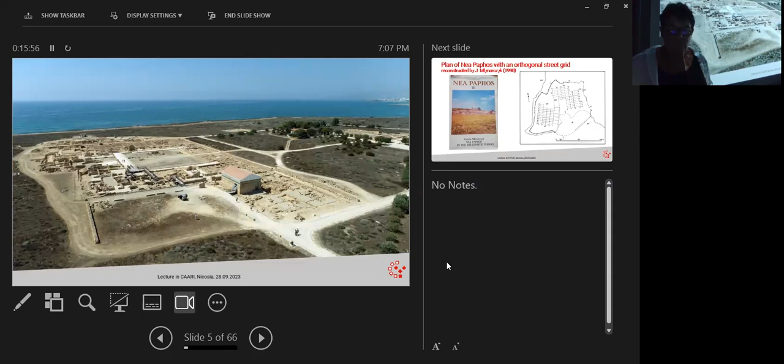In Maloutena, we have uncovered a lot of various buildings, but also the streets of the city. And one of the major achievements of this mission was the publication of Jolanta Młynarczyk of the plan of Nea Paphos, which was an orthogonal street grid, and it was reconstructed in the book published in 1990 by Jolanta Młynarczyk. And I will return to this topic later, showing you our research on the streets.

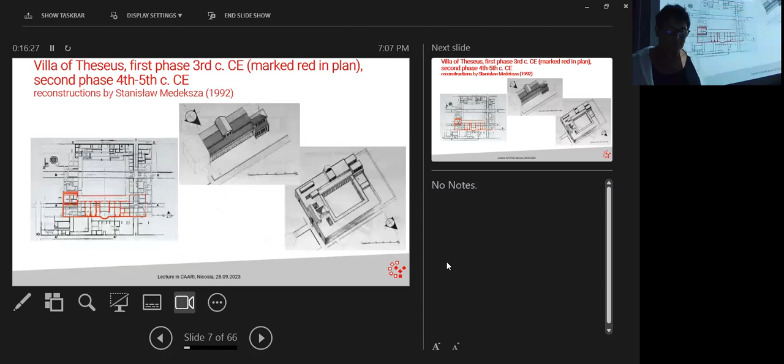The Villa of Theseus was one of the buildings uncovered by the Polish mission from the very beginning of the excavations, and you have here the plan of this villa, and also you see the first phase of the villa, and next it was enlarged, and you have here the two-dimensional reconstructions, and I will show you later the three-dimensional reconstructions made by our mission as the result of our research.

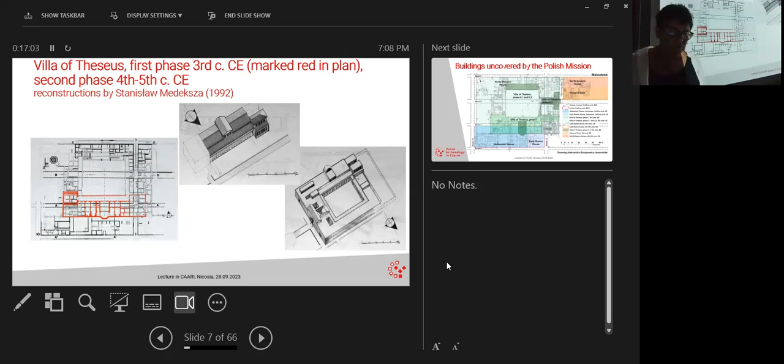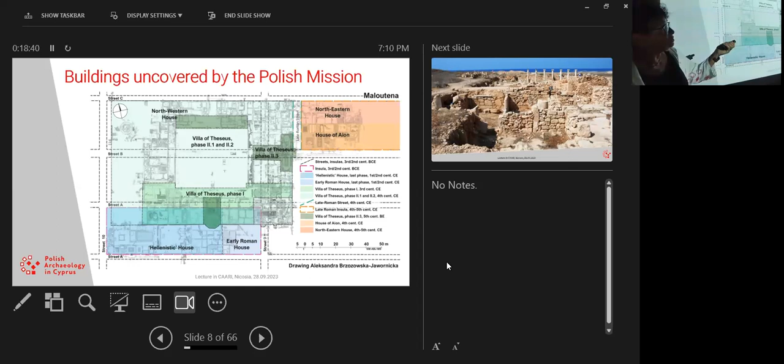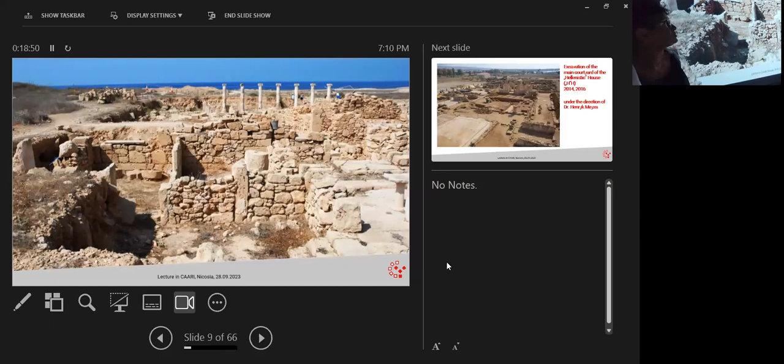The so-called Hellenistic House, this is a photograph from the excavations in 2006, and we excavated this huge house. It was excavated over many years, and you see here the excavations of the central courtyard, the reconstruction of which I will show you later on during this presentation.

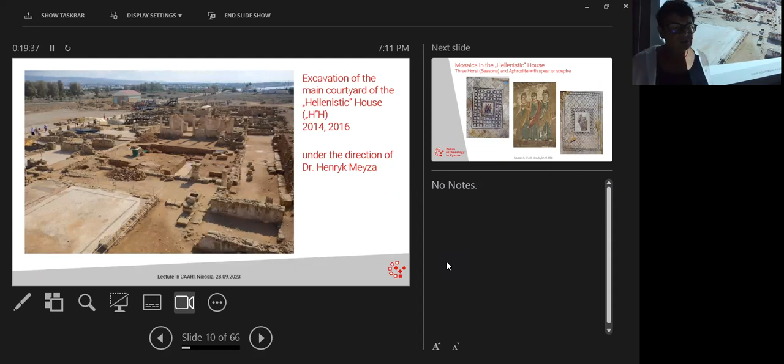The new result of our research concerning this Hellenistic house is that the mosaics which have been found before in this area here, in the first stage of research, were said to have been made in the Roman period after the collapse of the so-called Hellenistic house, and part of the rooms of this house were used for a new house, the so-called Roman house. But now we came to the result that these rooms with these mosaics were incorporated in the Hellenistic house, and they belong to the last phase of the Hellenistic house.

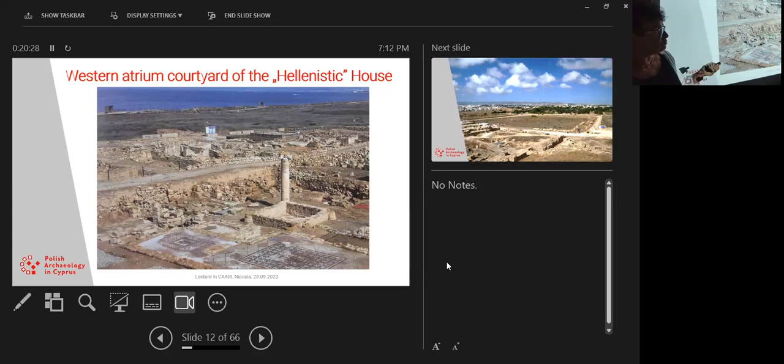So the Hellenistic House was a very big villa, which had more than 2,000 square meters and had two main courtyards. The main one you saw before, and this one is the western courtyard in atrium style, and you will see later the reconstruction of this villa. We cannot exclude the hypothesis that this villa was a public building, because it's really very, very big and richly decorated with mosaics, wall paintings, etc. So maybe this was not a private villa, but a public villa.

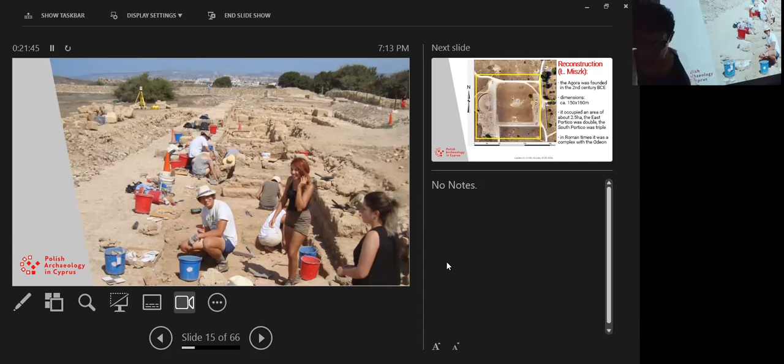The second part of our research was concentrated in the Agora of Paphos, which you see here, which was uncovered by Kyriakos Nicolaou from the Department of Antiquities, and we started the excavations here in 2011. This is the view of the Agora before the start of our excavations, and this is the progress. You see our trenches, and we had many results which have been announced in the publication Paphos Agora Project Volume 1. But I want to focus on the main result. You see here the students working on the Agora, and also the reconstruction of the Agora area.

According to our research, the Agora was founded in the 2nd century BCE, not in the 2nd century AD, as was established by Kyriakos Nicolaou before. And Kyriakos Nicolaou has written that the Agora had an area of about 1 hectare. We came to the result that the dimensions were much bigger; it was about 150 by 180. So this is the Agora with an area of 2.5 hectares, together with the porticos which surrounded the Agora. So it was one of the biggest agoras in the Eastern Mediterranean. So it is a very, very important result.

In Roman times, the complex of Aion was built on the western part of the Agora, and the so-called Asclepieion here. We have no good information from the publications of Kyriakos Nicolaou about this building, so we are not sure if this was really the Asclepieion, the building connected with the cult of the god Asclepios, and I hope that the Department of Antiquities will allow us in the future to make some soundings around the Aion and this building to see what was the chronology and the function of this building.

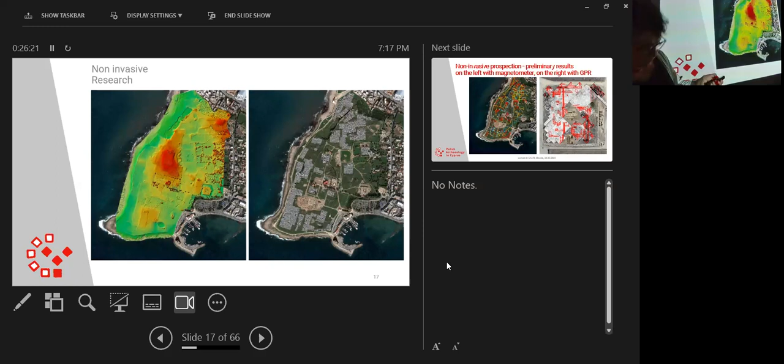And on your right, you see the results of the GPR prospection on the Agora. So we used magnetometer for the archaeological park.

Altogether, in the archaeological park, we could make prospections on about 18 hectares, not in the whole archaeological park, because I would like to remind you that the archaeological park is also a protected area by the project Natura 2000. So we cannot cut the bushes in the archaeological park to make prospections. We only can make this prospection in some areas. But still it was really a huge area prospected by the geophysical research.

And here on the right, you see the results of the GPR in the Agora. The georadar in the Agora showed us fantastic results. For example, we can see here the northeastern corner of the Agora, which cannot be excavated because here is the modern way, modern streets, so we cannot excavate here.

But we see this corner in the image from the GPR. Also, I would like to pay your attention to this line, which is probably one of the streets. And this street is not indicated in the layout of the streets of Jolanta Młynarczyk. This is something totally new, and maybe it was some street which was in use before the creation of the street grid or in other periods, we don't know yet, because the interpretation of these results is still in process. So we cannot say all the results now.

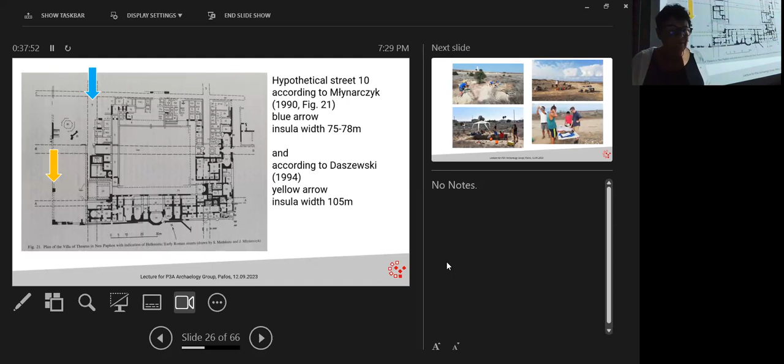So at the starting point of our research, we put some trial trenches in these crucial points. You see here the excavations. Of course, we had to confront the pandemic situation because we started the project in 2020. So it was impossible to come to Cyprus with students. So we came in a small group. Still, it was really very, very difficult, but we did it. And we started the project in 2020.

We selected these two points. This is street B, street C, and street 10, which according to Jolanta was going not here, but here. And this is the House of Orpheus, so this is the street dividing the Villa of Theseus from the House of Orpheus.

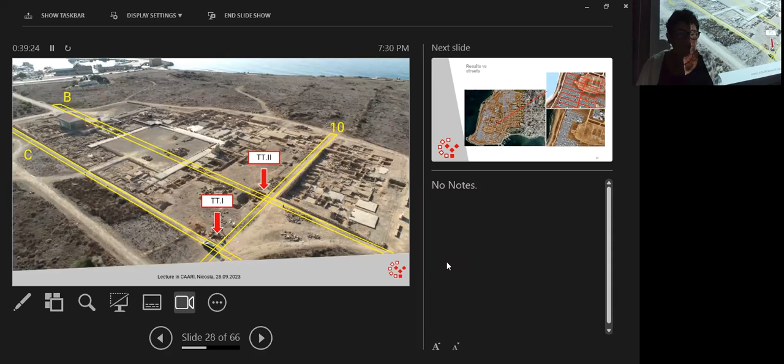We put two trenches here at this crossing of the streets, but unfortunately we didn't get good results because of later buildings and parts of buildings we found in these two trenches. It's not so easy — you expect some results, but you never know what you'll find during excavations. So we had to choose other points for trial trenches around the Maloutena.

When you confront the results of the geophysical research, here you see the detail — this is Maloutena, the House, the Villa of Theseus, etc. This point here is the House of Dionysos. And you see the interpretation of the geophysical prospection here, and these lines are the lines of the streets — this is Maloutena, Villa of Theseus, and to the west of this.

To check if the streets really fit with the Jolanta Młynarczyk plan, we put some trenches. One of these trenches is here, the so-called trial trench 6, and another one was in the line of street A.

Here are the two trenches I showed you before, and here's another trench on the line of street A. This trench gives us very positive results, as well as this trench at the crossing of street 11, which is to the west of street 10 I showed you before. This is street 10, and this is street 11, at a distance of 105 meters to the west from street 10.

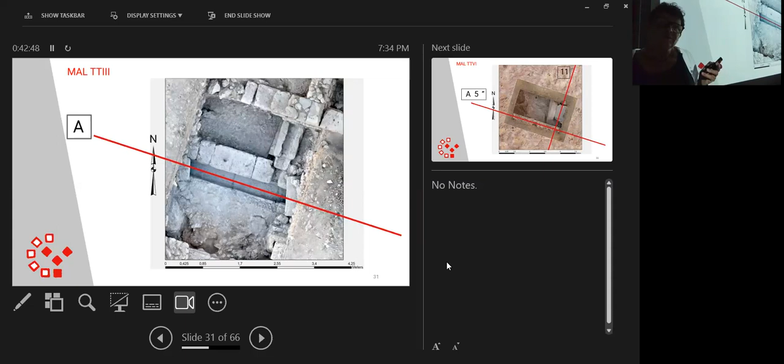It seems that probably some of the streets were not erected at the starting point after the founding of the city — not late 4th, early 3rd century, but a century later. We have confirmation for this result in other research too, so probably the layout of the streets was created later, not at the starting point of the Nea Paphos city.

In the second trench I showed you before, we also found partial results — a street going east-west, street 11 going north-south, and the channel. So we had positive results here.

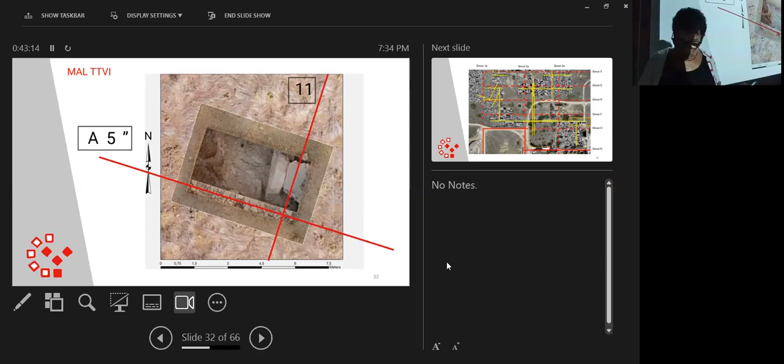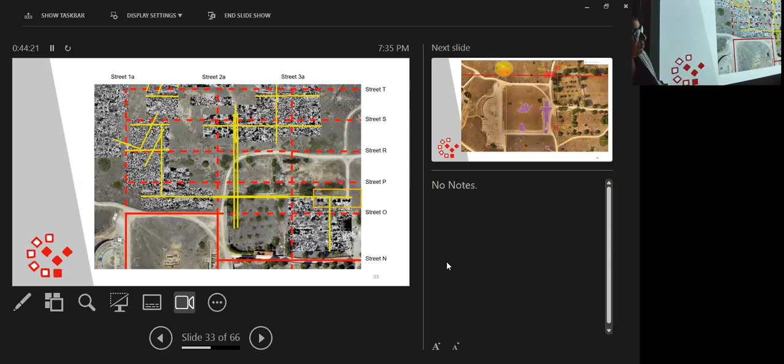To check the situation here, we made some trial trenches around the Agora, 16 of them altogether. In some we got positive results and confirmation of the streets. I'd like to show you only three examples of these trial trench results — this is the Agora, and you see the trial trenches marked here around it.

One of the most important was this trench, which gave us the positive results. This is the final stage of the excavation, and you see here, this is a street P going west-east, and you see here the pipelines in two phases, one earlier and one later, and you see also the pavement of the street, which is very interesting, because this is the same street which was found during the Australian excavations south to the theater.

This is a theater, and this is the street, street P, which is running in front of the Nymphaeum, excavated by the Australian mission. You have here the line of the street P, and here is the trench in which we found the same street. So we confirmed that this street P was going on the line from the theater to the Agora.

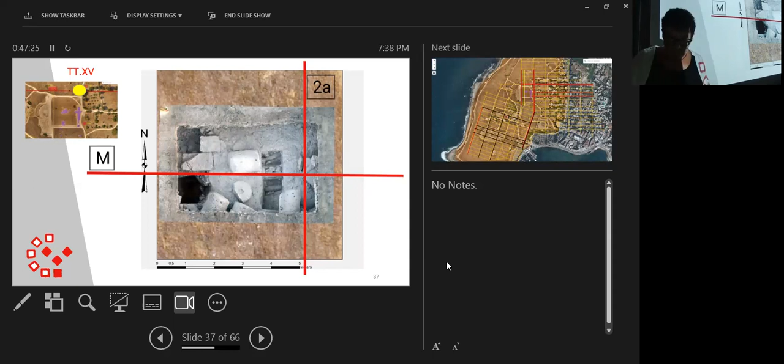So one of the results of our research is that the columns of the east portico have fallen out of the Agora, in this line, not turned to the Agora, but from outside of the Agora. Some of them are laying down in this street M. Below the street, we found the channel. So it's all confirmed, and we have very good results here.

And other research in this area. So we have positive results in many points, and we can say that we confirmed many of the streets, and the width of the insula is 105 meters.

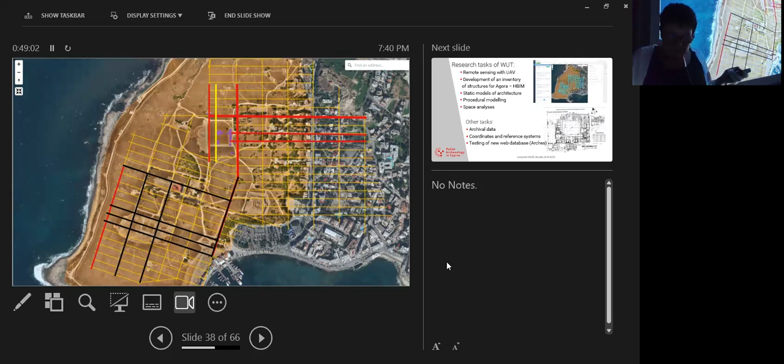Also, this is one of the streets which was not existing, this one I showed you before, not existing in the plan of Jolanta. We will have to analyze the results concerning this street and publish the final results.

The second part of the research is concentrated on work made by the Warsaw University of Technology team. All teams are working under my direction. The tasks of the Warsaw University of Technology comprise remote sensing, development of an inventory of structures of the Agora, static models of architecture, procedural modeling, and space analysis.

Another task is the research on archival data, for example old photographs and satellite imagery. We compare the old photographs from satellite of Paphos, streets, etc., with the new research made by us and others, and Jolanta, etc.

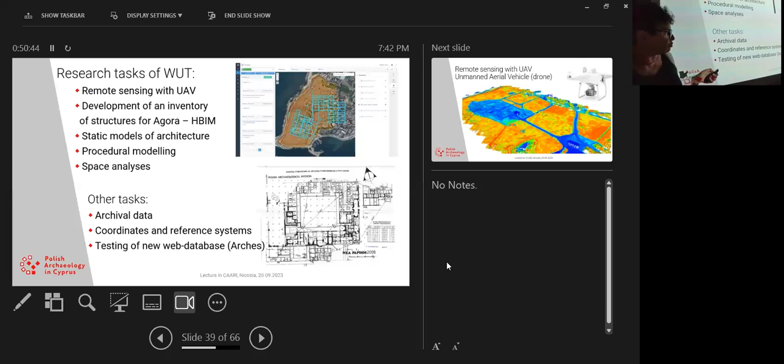We are also testing a new web database called ARCHES. This is a database created by the Getty Institute, and it's free for use. We chose this base to put all our data on this system. So we develop and test this new database, which is also a very important task, because we have a lot of data - gigabytes, terabytes, we can say. So it's very important to manage all this data.

So all these elements are compiled together to build these three-dimensional reconstructions of the city. The remote sensing comprises not only the satellite photographs, etc., but also photographs made by drone, which is an unmanned aerial vehicle - this is the official name of this device.

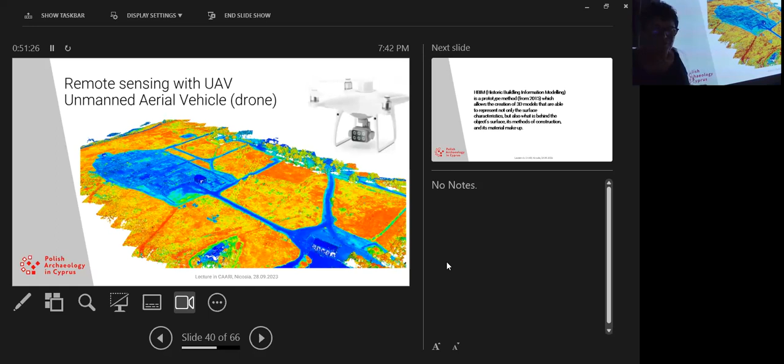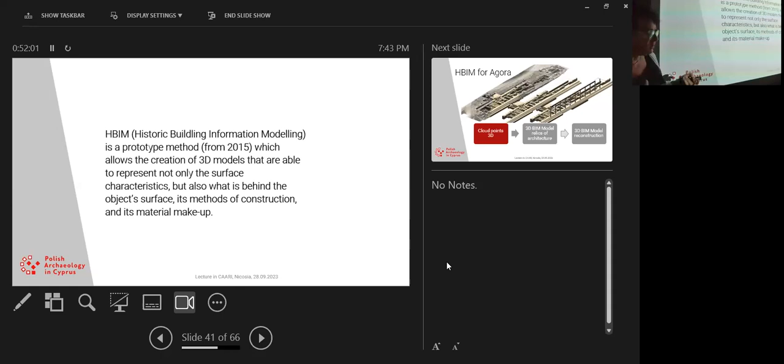The scientists from Warsaw University of Technology also use historic building information modeling to make these reconstructions. This is a prototype method implemented from 2015, which allows the creation of 3D models that are able to represent not only the surface of the building, but also what is behind the object surface, its methods of construction, and material makeup.

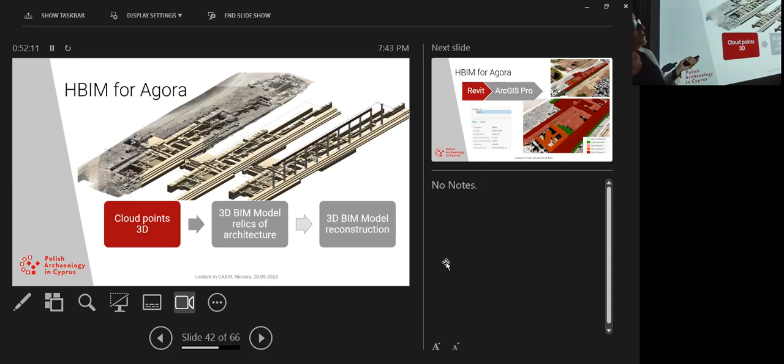Using these programs, we make the reconstruction of the buildings in the Agora, the buildings in the Maloutena site, and other buildings. Here you see one example of this building information modeling - this is the east portico of the Agora. Starting from the cloud points and using this BIM model, we can recreate the construction of this portico of the Agora. So you see here the results, the columns which are built up.

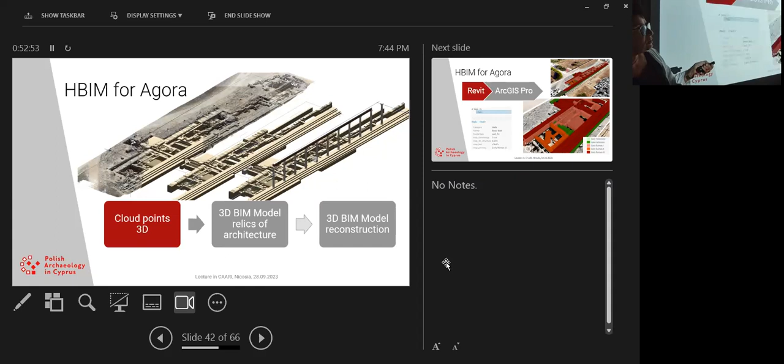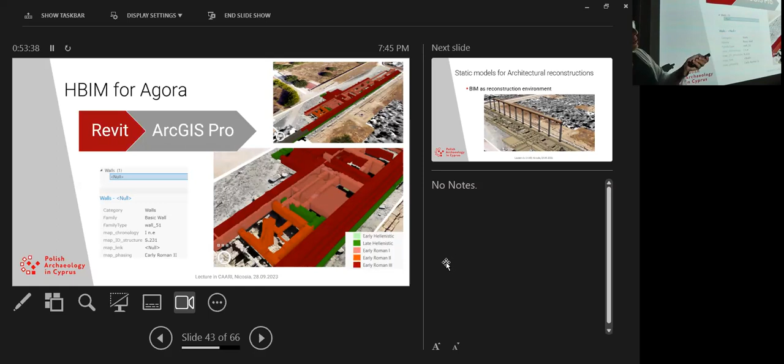So we will recreate this portico, and generally the Agora, in all these phases separately in these 3D models. And here you see the first results of this recreation of the eastern portico of the Agora, using the BIM method.

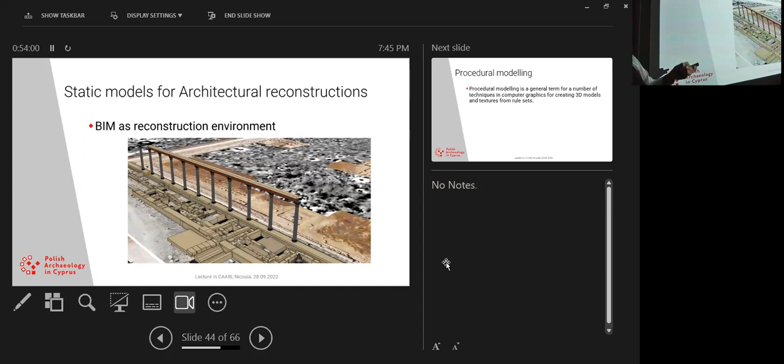So this is the one part. Another area of this research is the use of so-called procedural modeling, because in Paphos, as far as the Hellenistic period is concerned, we have no buildings preserved from the Hellenistic time. We only have parts of buildings which are under the Roman structures.

So to recreate the 3D model of Nea Paphos in the Hellenistic period, we use analogies from other cities close in historical period. For example, we took Olynthos, Priene in Asia Minor, Ptolemais in Libya, and comparing these plans, which also have been founded on Hippodamian plans, we made the 3D models of buildings in Nea Paphos.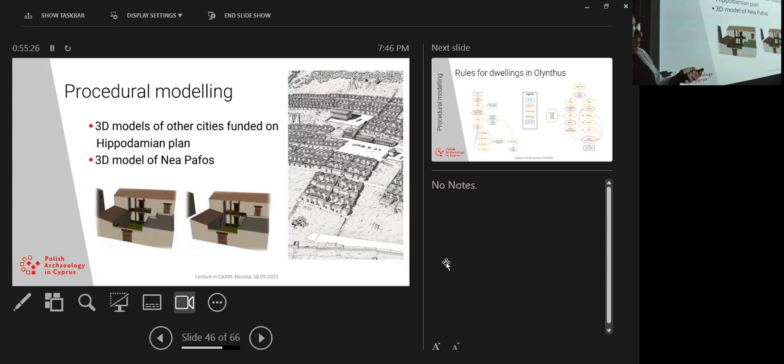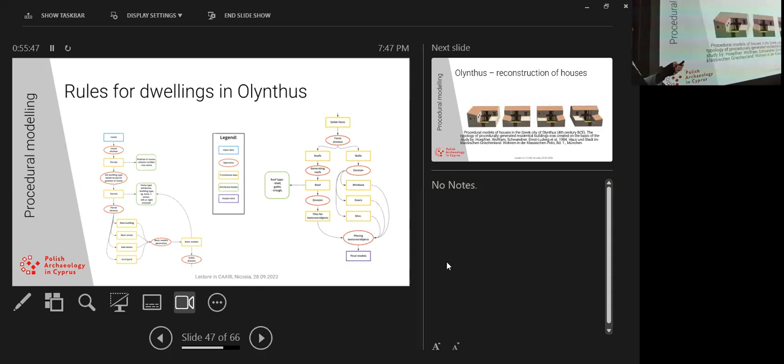Here you see Olynthus, which is reconstructed, a town in Greece dated to the 4th century. And you see the reconstruction of the houses of Olynthus, and these are the rules which have been used for reconstructing these dwellings. After recreating these rules, we also created rules for the reconstruction of the dwellings in Paphos.

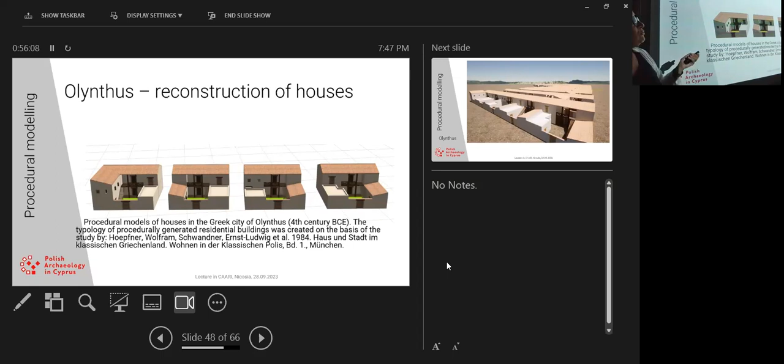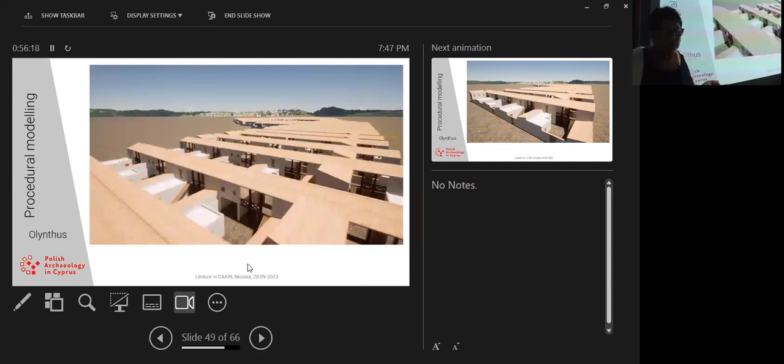So after using these rules, we came to the reconstruction of Olynthus. The basic publication was by German researchers, and based on this we made the procedural modeling of these houses in Olynthus. This is the reconstruction of Olynthus, part of the city and the Agora, and we will do the same for Paphos at the end of our research.

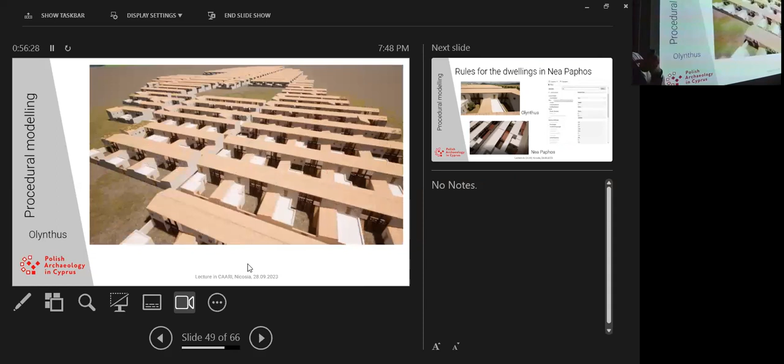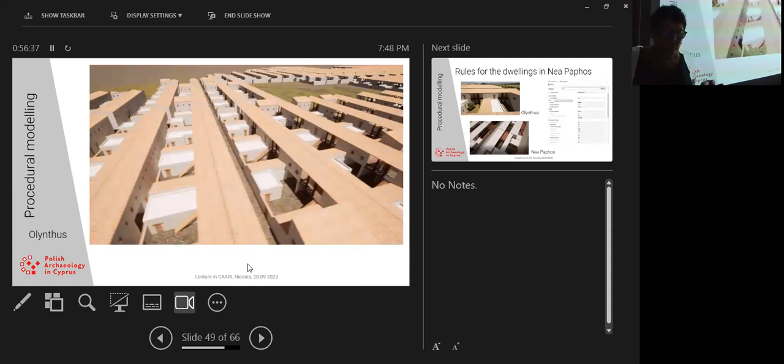I cannot show you this for Paphos now, but in the next lecture I will show you the final results for Paphos. So this is Olynthus, and these are the rules for Nea Paphos.

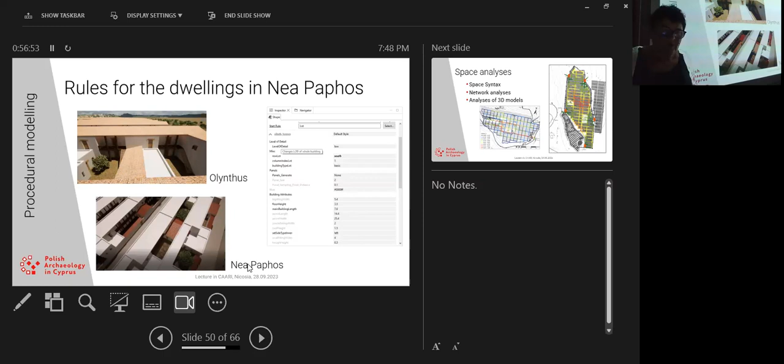And after implementing this procedural modeling, we have been able to recreate the first reconstruction of Nea Paphos in the Hellenistic period.

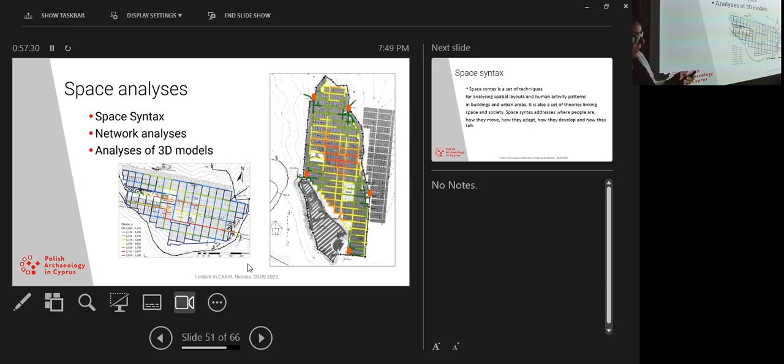The other element of this research is the so-called space analysis, which includes space syntax, network analysis, and analysis of 3D models. Here you see this for Priene and Olynthus. When you make this spatial analysis, it is a set of techniques for analyzing spatial layout and human activity patterns in buildings and urban areas.

It's also a set of theories linking space and society. Space syntax addresses where people are, how they move, how they adapt, how they develop, and how they interact in the city. This helps to reconstruct the main areas of activity of inhabitants.

Here you see the result of choice analysis - for example, which streets have been more visited by people. In red, you see the main streets used by people in Paphos. And here you also see the integration pattern of the city. In red we see the main areas, and after this analysis we confirmed that the main street went from the harbor to the Agora, which is here. Here is the theater.

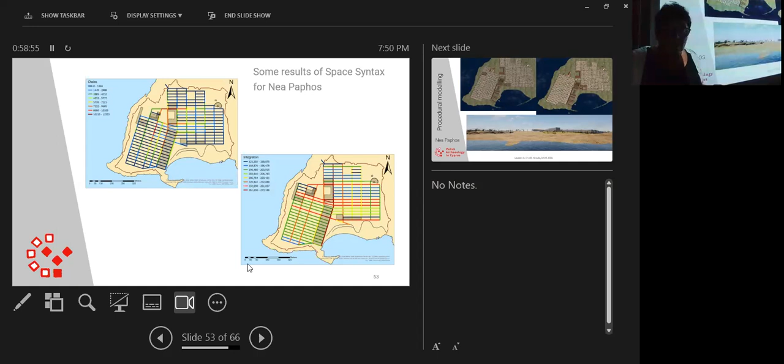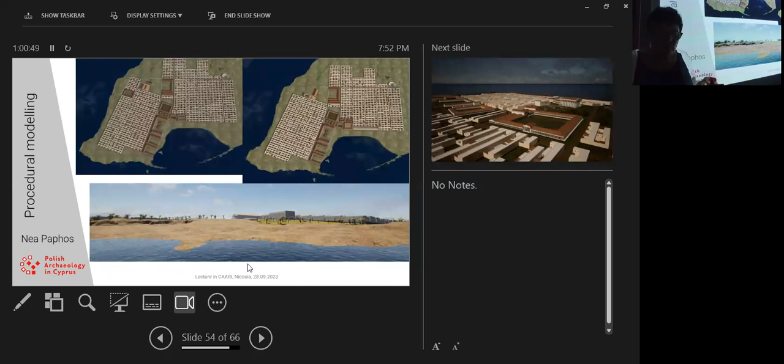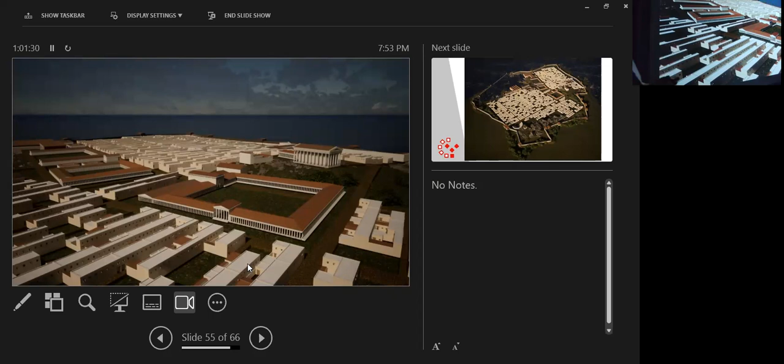And this is part of the reconstruction of the central part of the city in the Hellenistic period. The Agora, according to our research, was surrounded by porticos, and the east portico was double, and the south portico was triple in the width. So we reconstructed this here, and the temple of Aphrodite on the Fanari hill, and the public buildings along the street going to the harbor, and buildings in other areas of the city.

And the general picture of the Hellenistic period of the city. You can see here the Fabrica Hill theater, the sanctuary here of Apollo Hylates, excavated by the Italian mission, the Agora, the temple of Aphrodite Paphia, buildings, and probably the harbor. We have not a lot of data about the harbor, because now, as you know very well, the parking place is built here. So only from the research made years ago by Hohlfelder and his team can we say something about the harbor.

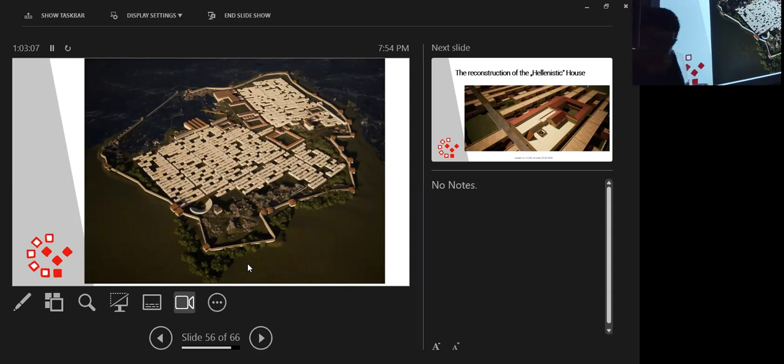And here on the Fabrica Hill, which is explored from the south part by the Australian mission, the theater here, and on the Fabrica Hill there are ongoing excavations directed by Claire Balandier, and also Jolanta Młynarczyk participated in this project with her own project. And Jolanta concentrated her research on this part, on the temple of probably Aphrodite on the Fabrica. So we put here the reconstruction of this temple, and I will show you this reconstruction in a moment.

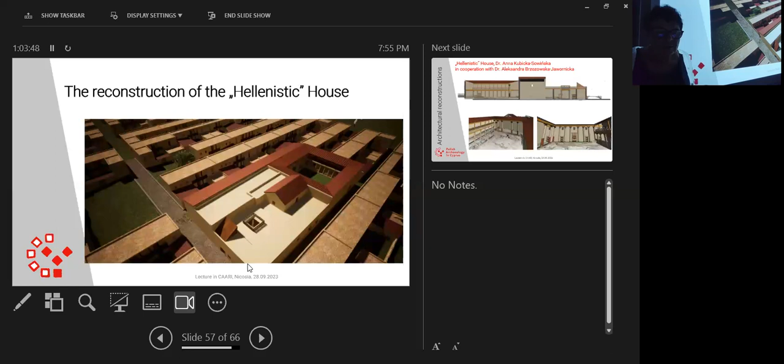Before, I would like also to show you the reconstruction of the Hellenistic house, which you saw before, and here you see the Hellenistic house in the last phase, end of the first and beginning of the second century AD, and the big main courtyard and the western courtyard in atrium style. And the reconstructions of the main courtyard. It was built in various orders: Ionic, Doric, and so-called blocked-out, and also Corinthian.

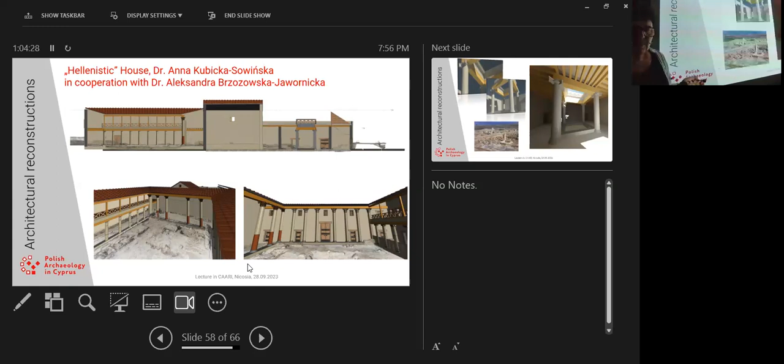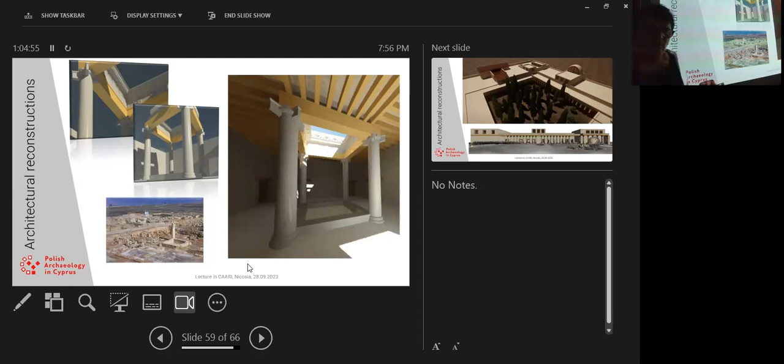So you see the reconstruction of part of this courtyard of a Hellenistic house, which is very interesting because probably here was an upper gallery, because these columns are not so high as the columns from the western part of the Corinthian style. And the western part with the atrium style courtyard is reconstructed like this. You see here the reconstruction of this atrium style according to Vitruvius' rules. And you have here these blocked-out columns, called before Nabatean.

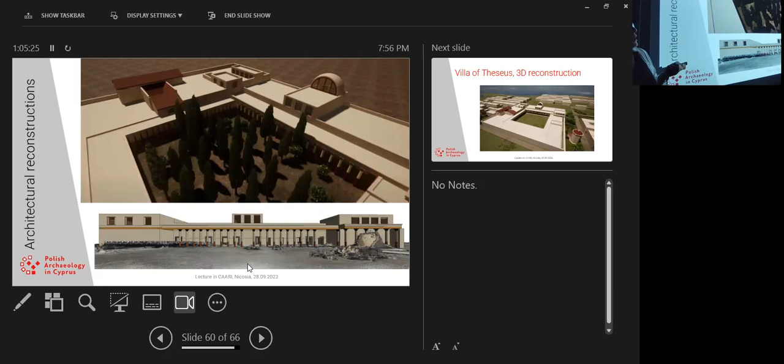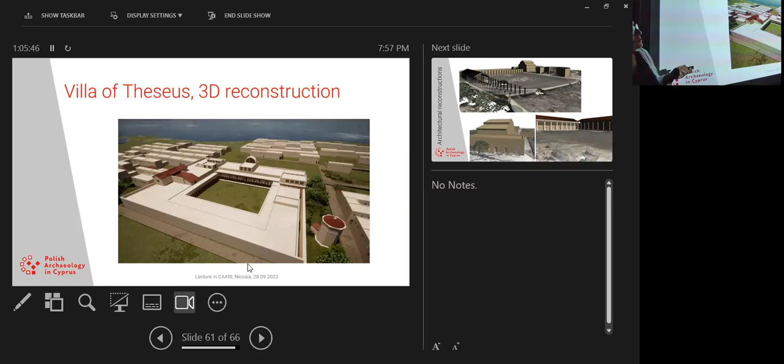And the last reconstructions, the Villa of Theseus. In the first phase of the Villa of Theseus, it was only the southern wing, and in the second phase the Villa of Theseus was enlarged, very big, the biggest Roman public building uncovered in Cyprus until now. And you see the reconstruction of the last phase of the Villa of Theseus here, and probably this tower, probably a Horologium Publicum, as it was put by Theodoros Mavrojannis, and the Agora in Roman times.

After our research, we came to the result, which was proposed by Dr. Anna Kubicka-Sowińska, the architect of our mission, together with Aleksandra Brzozowska-Jawornicka, that the so-called Asclepieion was the basilica. We have analyzed this, and it is still not published, but I show you the first reconstruction. So this is the Agora in Roman times, the porticos, this basilica hall, and here the Odeon, which was built in the Roman period.

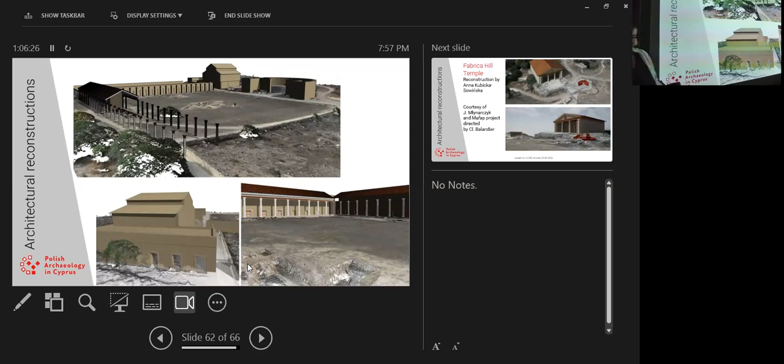And we move now to the Fabrica Hill, the reconstruction of the temple, and Jolanta Młynarczyk uncovered here the dining place, the so-called stibadium. So you see the reconstruction of the people sitting here in the stibadium during the dining.

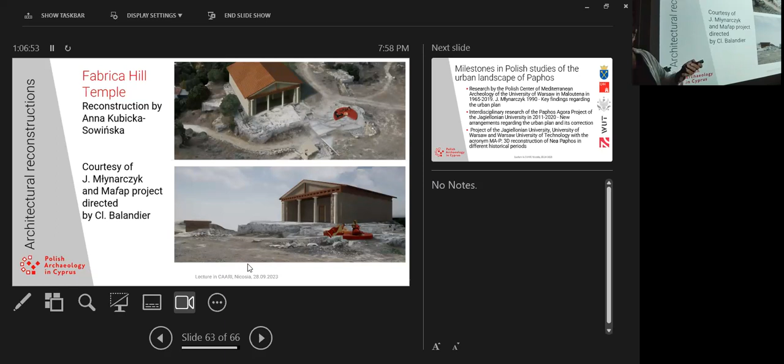Yes, I'm finishing. So these are the milestones of our research: Jolanta Młynarczyk, our research in the Paphos Agora, and now the 3D reconstruction of the city of Nea Paphos. And I would like to invite you to the celebration. In 2 years, we will celebrate 60 years of Polish excavations, and we will organize events here in Cyprus and also in Poland, I hope. So thank you very much for your attention.